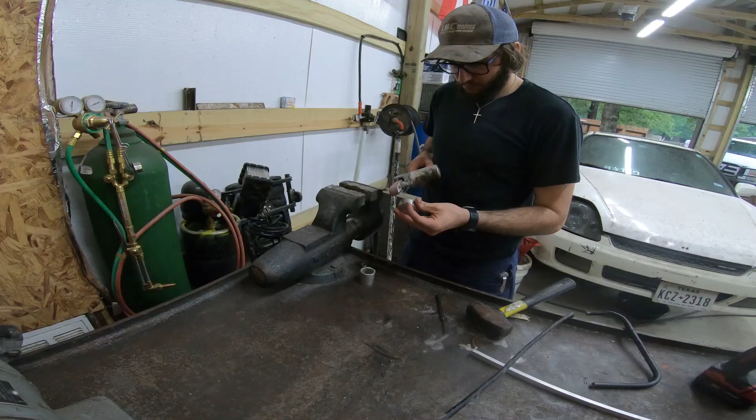Alright, so here's the plan. Cut this piece out of some scrap bar stock I had. I'm going to drill - well, there's two options, I hadn't quite decided yet. I'm either going to drill 4 holes in this and screw it, or maybe 2, and screw it into the mast with some countersunk screws. Then I'm going to drill a hole in the side and put a set screw in, so that when I put this anemometer assembly in, I can run a set screw in and just jam it in place.

I'm going to go over the mast now and see what option works better. Another alternative is to weld this to a plate and then screw the plate in, but I think the smaller this thing is, the less it'll cause issues with any rigging on the mast. And I like the fact that this is round, so if a halyard does get stuck on it, it's not going to cut into the halyard. It's smooth all the way around. With this Dynafile, I'll smooth out all the edges. But anyway, I'm going to walk over there now and see what option is going to be the best.

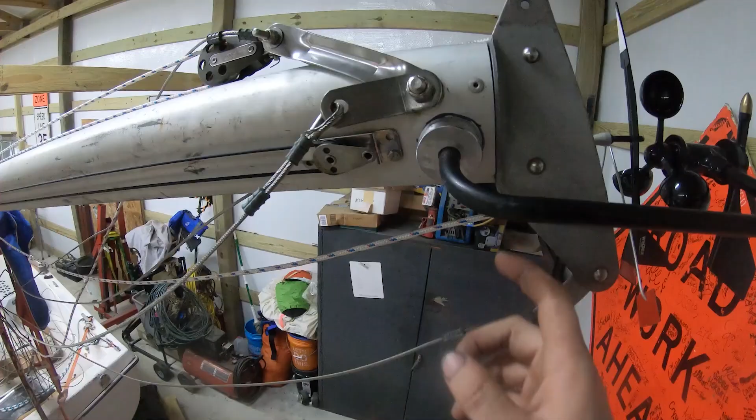Alright, so now I'm going to take this bushing off, drill my 2 holes and countersink them for the screws that'll hold it in place, and then I'll also drill my hole probably on the bottom for the set screw that'll hold the anemometer pipe, I guess you will, in place.

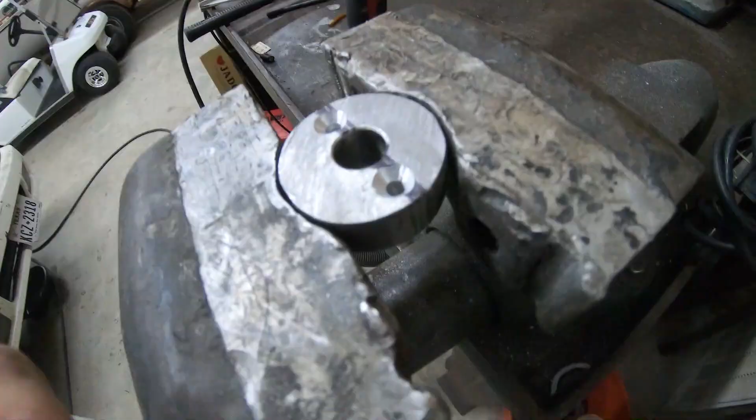Alright, so we've got this with the countersunk screw holes in it. We'll just go set this up on the mast and run a center punch through here to punch the 2 holes for our pilots, and then we'll drill them big enough where we can thread these in and they'll still grab. Alright, before we go over there and install this on the mast, I'm going to go ahead and drill for the set screw.

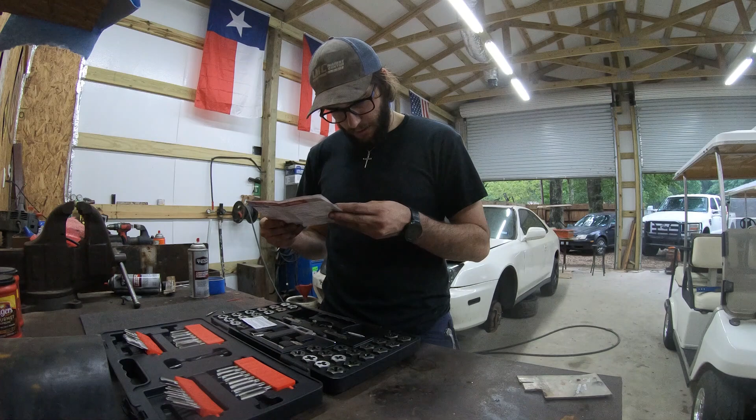And I have a stainless steel screw found in the junk drawer. 832 needs a number 29 bit. Alright, number 29.

Alright, so I actually found a little bit shorter screw, so what I've done now is just countersink the entire hole. And as you can see, the screw tip barely sticks out. It'll probably be fine. That gives me a little bit of flexibility because I want to have enough meat to get a good bite on the tube, but I don't want to have enough to crush it. So I think that's enough where even if I set it all the way down into its countersink here, it's not going to completely destroy the tube.

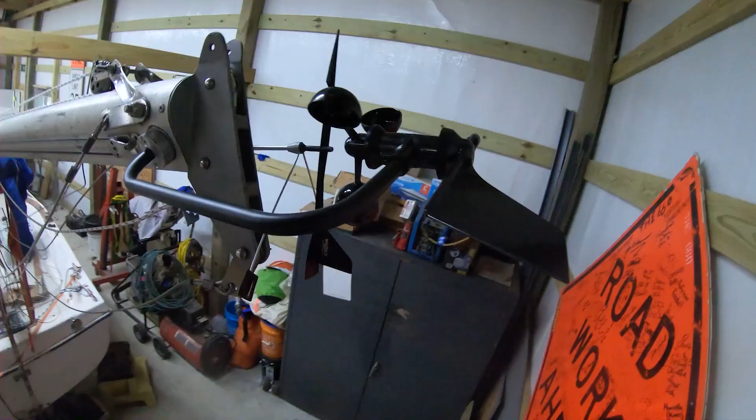Alright, so that at least temporarily wraps this up. We got our set screw here, the 2 screws holding this bushing to the mast, and I put this on the bottom so that it will naturally shed water. Here's the finished product.

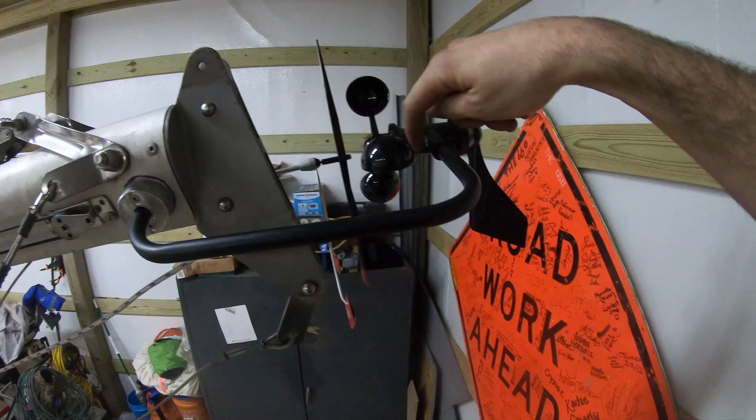You see this is pretty much parallel with the mast. I can rotate this piece. There's a set screw right here, so I can actually rotate the anemometer head itself. But if I spin both pieces, you can see that nothing contacts, so it tells me I'm good.

I'm kind of curious to see how this will react, like if the wind speed portion of the anemometer actually creates some sort of turbulence in the air. But honestly, this is going to be just a backup because I'm going to be relying on the app I have written to display my wind direction. So this is again just a backup and a quick visual reference if for some reason the tablet is dead or whatever. But I don't want to get rid of it, it's important to have.

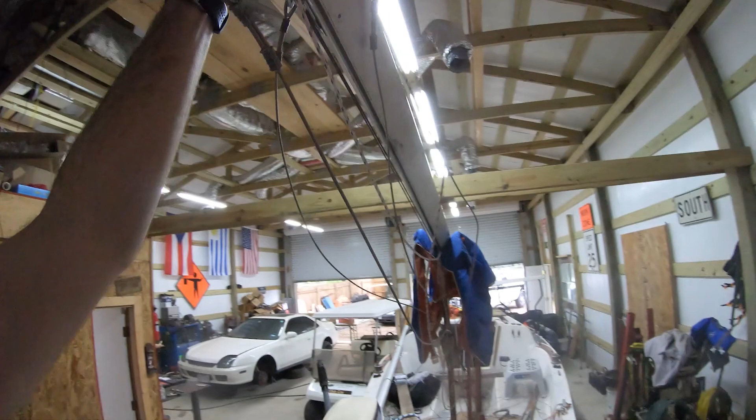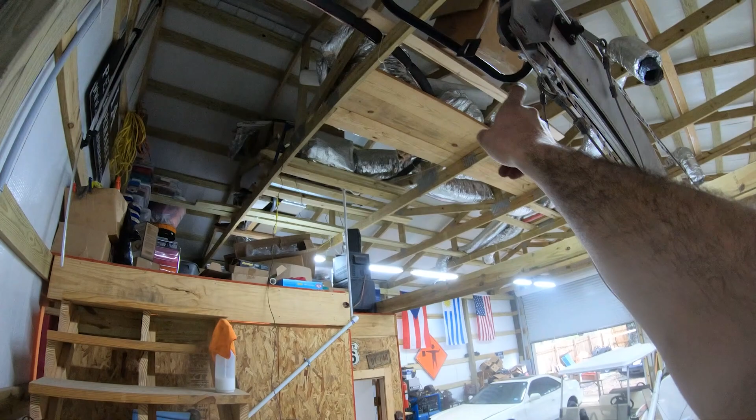So anyway, something else I've done is I lowered this wind vane, the Windex, by about 2.5 inches, just in order to get clearance so I could use the factory tube. Obviously that was bent, as you guys saw earlier. Anyway, that wraps up this portion.

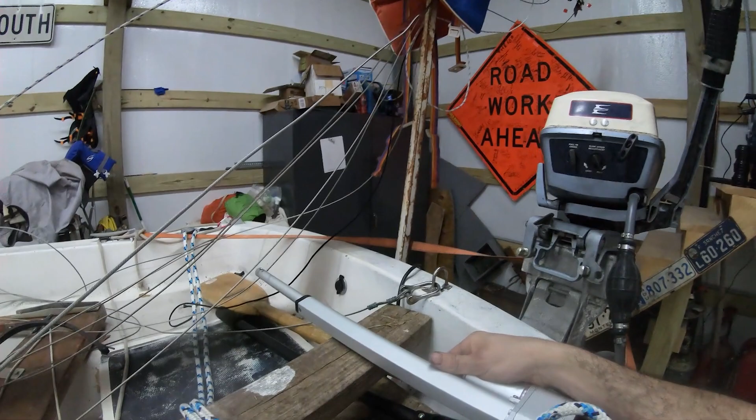So next up we will be tinkering with the cylinder. The boat's kind of a mess right now, but I have the actuator measured up. This is exactly halfway out, which is going to be our home position.

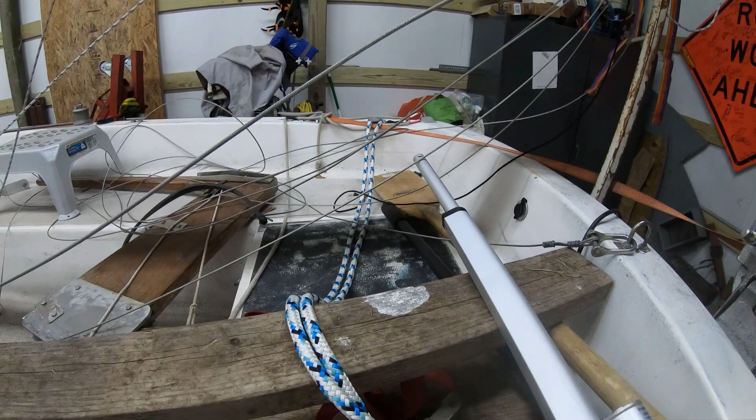I'm not sure how far back I want to mount it. That's the other reason I got a 150-pound force, because it may only be 20 pounds or so of force at the end of the tiller, but I'm going to be mounting this pretty far down on the tiller assembly itself. So having that additional force at the base, since it doesn't have as much leverage to help it, is going to be beneficial.

So I'm going to figure up a mounting solution for this. I think I want to mount it below the tiller, so I'll have a stud sticking out of the tiller that this will come up on, and like a cotter pin or a nut or something will attach it. I do want to be able to quickly remove it, but I need to figure out how I want to do that.

I may actually just do a 3D printed setup, have a bolt coming in with a nut holding a little 3D printed flange that I can pull out of the way and slide this up and down. And then absolute worst case, if something happens and I can't get to it in time, I can just smack this pretty hard and break that 3D printed piece. So the preliminary idea will probably just be a nut or a wing nut very lightly fastened.

And then on this end, I want to have some sort of bracket that I can install and remove the entire cylinder easily, because eventually somewhere on the transom here I'll have a plug for it, some sort of weatherproof plug, so I can remove it and get the cylinder completely out of here so it's not in the elements.

This obviously isn't going to be the long-term solution for a cylinder, because it's supposedly weather resistant, but it's not. It's just got these little cork gaskets, and it's poorly sealed. So I may make a fiberglass case for it or something, but more than likely I'll just find a good rugged cylinder with similar dimensions that I can modify to fit my existing system.

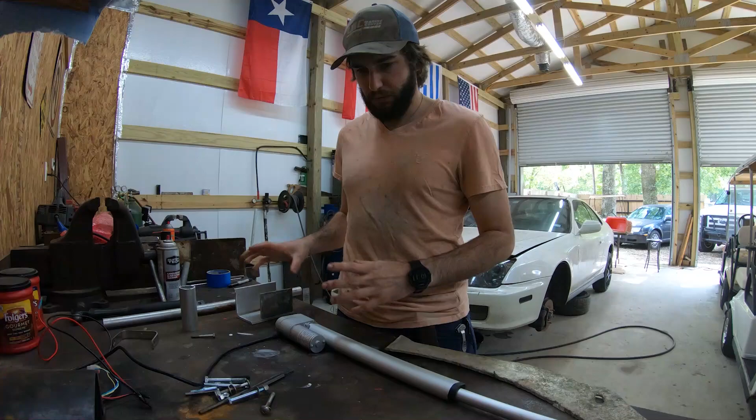But for the time being, this will work fine. The boat isn't going to sit outside all the time, it's going to be inside unless I'm using it. I could wrap it in a trash bag or put some sealant on the outside just to help it last, but I don't expect it to be a long-term solution for an actuator. So what I've decided is I was going to try to fabricate some sort of swivel assembly, but I don't think it's necessary.

So what I'm going to do is build a bracket, and I'll show you kind of what I've drawn up on the whiteboard now. I'll build a bracket where this actuator will sit on a bolt, which will give me the up and down motion I need to insert and remove it from the bottom of the tiller where my stud is going to be for it to interface, and will also allow me to pivot it and stow it away, still on deck. Then when I want to remove it, I can just pull the bolt out.

I'll probably end up using either a bolt, or I'll just get a piece of bar stock and drill a hole for a cotter pin on the bottom, or some sort of simple retainment, maybe a wing nut. I'm not sure yet, but anyway, I just need up and down, and then rotational motion, because as the actuator extends, it's actually going to need some rotation since the angle will change.

So that's kind of what I've got. I've got it drawn up on the whiteboard, and I'm actually going to draft it up in Inventor and then print it out 1-to-1 scale on a sheet of 8.5 by 11, so I can trace it out and then cut it from my aluminum sheets.

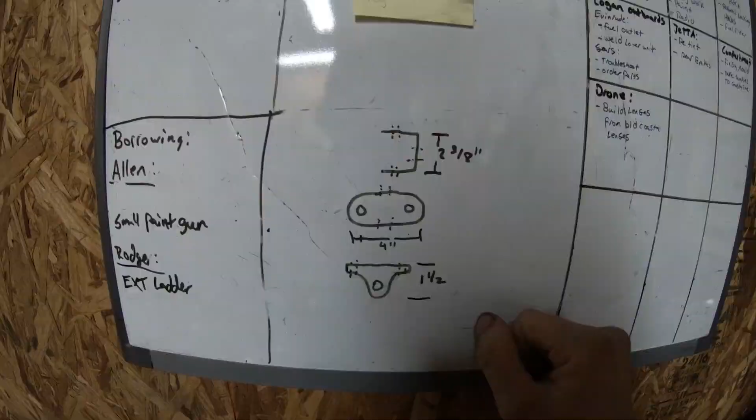All right, so here's the side view, the front view, and the top view, and what I'm wanting to do. So I'll have 2 bolt holes that bolt it into the gunnels on the inside of the boat, and then this is where that bolt/pin will go that the actual actuator will rotate on, and then these 2 holes here. So anyway, this is kind of the shape I'm looking for.

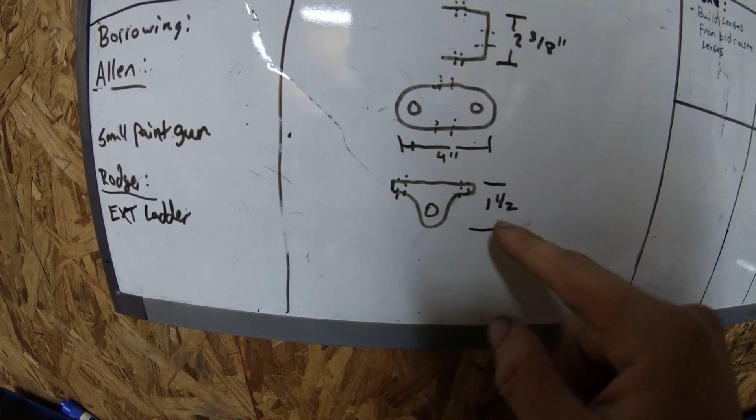I'm going to get on Inventor and throw something together. The other thing, I was going to use that piece of angle I had sitting on the bench, but the gunnels are actually slightly tapered, so I'm actually going to have to weld all of these pieces individually, because these will actually be at a slight angle.

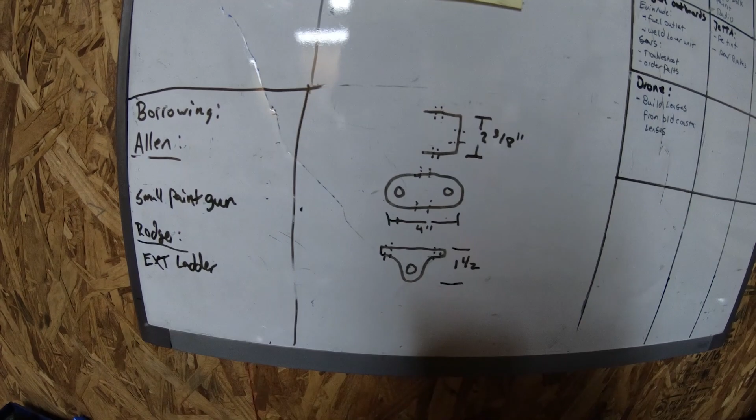It'll look something more like this. So there will be a slight angle here.

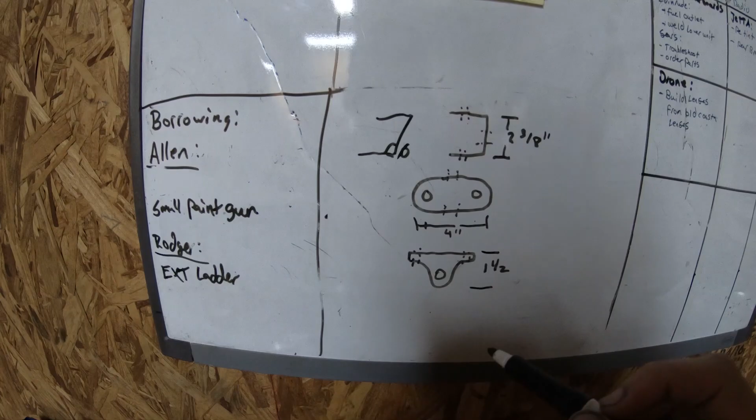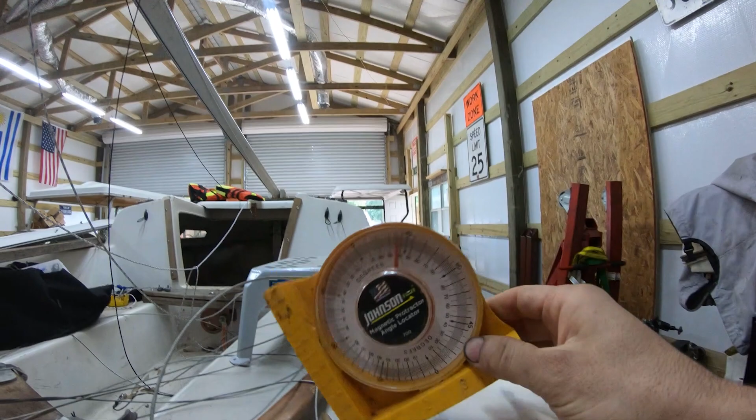All right, just so y'all can see what I'm talking about here. The boat is pretty much level on its trailer here in the shop. And then if I put this on the gunnel, you can see this is about 10 degrees off the vertical. So we do need to account for that.

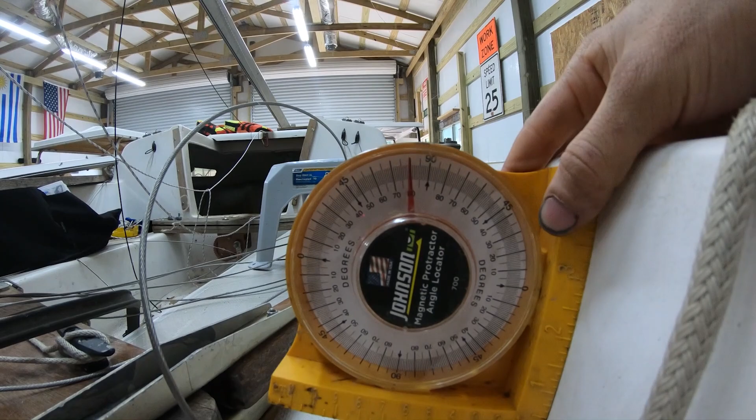I'm just going to make 3 individual pieces and then weld them up 10 degrees off the vertical on the tab. So all right, I've got my drawing printed out and cut these out, and then I'm going to use them to trace onto a sheet of aluminum, and then I'll cut the aluminum out and start fabricating this.

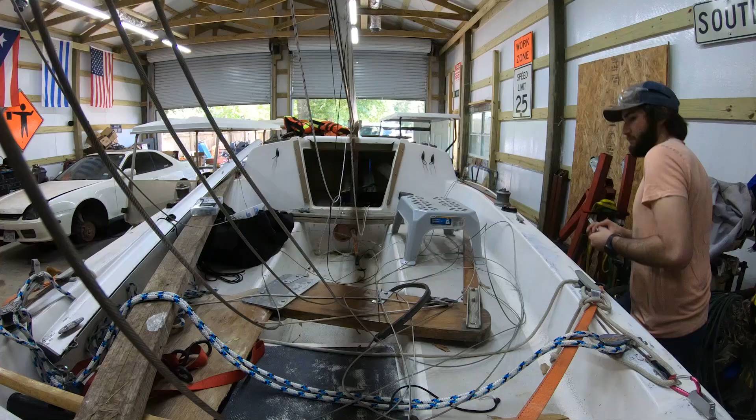Alright, so I got my pieces cut out. Turned out alright, it's just hand cutting the plasma on aluminum, so it only gets so good. But anyway, got them all buffed up, cleaned up, pretty close to being weld ready. All I need to do now is wipe them all with acetone before I actually weld.

But I wanted to just set it up here and see kind of what this is going to look like. So I do realize now that I've made a slight mistake in that both of these are the same length. One of them really needs to be shorter than the other because of the angle. So what I'll probably end up doing is welding one on top and one on bottom, and that'll get us quite a bit closer, and then I can just grind them back to the same dimension.

So by that I mean one of them will be welded here on the edge, and then one of them will be welded on the actual top of the plate. So something like this, if I can see that.

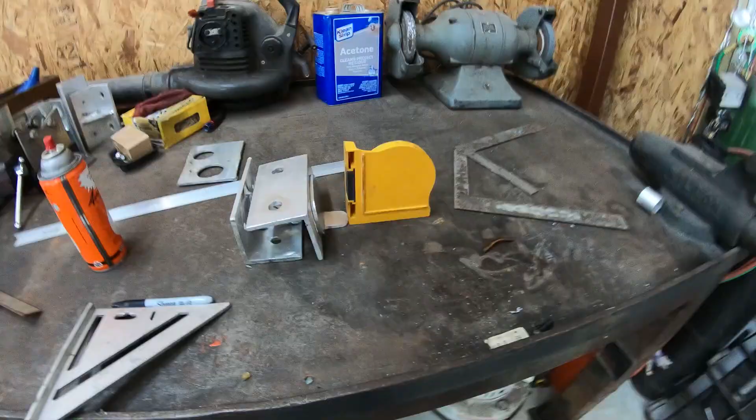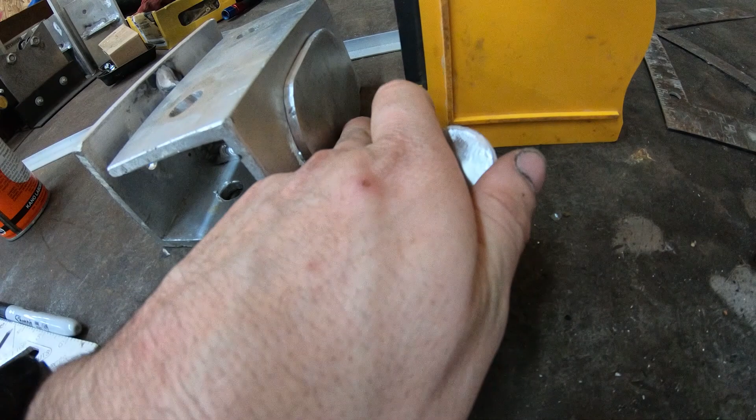Alright, so I have my plate here set up at 10 degrees. So I've set my flange there. And then I've set this piece below and flush up against this back plate. We're about 1/8 of an inch of difference between the two, which I'm tempted to say is acceptable, but I may go ahead and cut another one a little bit longer just to cover our bases here.

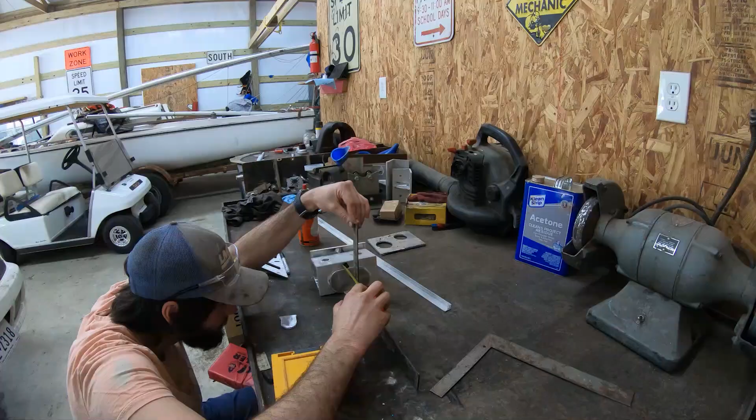Alright, so the new one's going to be 2 inches long, and this is 1 3/4, so we got to add a 1/4 inch to this length here. Alright, so I got my other one cut, it's a little longer. As you can see, about a 1/4 inch. So now we'll see what this looks like.

That's just about perfect. So I guess this one's a little better. Yeah, so that one's just a hair better.

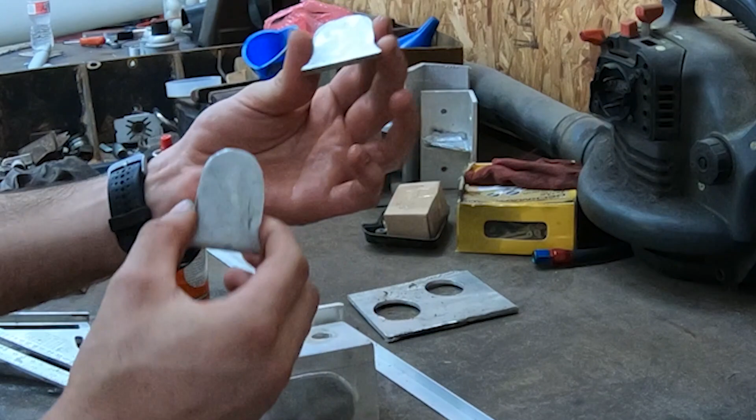So what we'll do now is come in here and shape these to where they're the same. As you can see, the back one is just a little bit more blunt, so I come around and shape it. Then I'll drill both of them together so the hole is in the same position relative to the tip, which at that point the tip should be the same distance from the plate, and then we'll go ahead and weld it in.

Alright, so what I've done here is just clamped the two together. Now I'll use the smaller one as a guide, it'll be just fine. I'll come in here and shape all these together so they're uniform, so the tips are even. I just got to knock off these little corners, and I'll come back to knock off these little radiuses on the ends. But anyway, we'll go over to the Dynafile and get these straightened up.

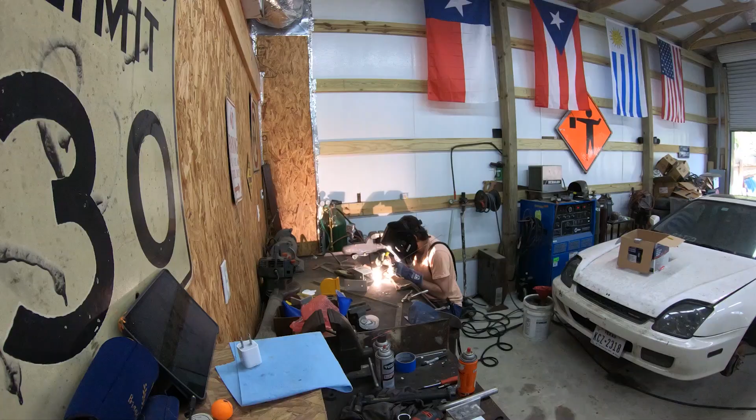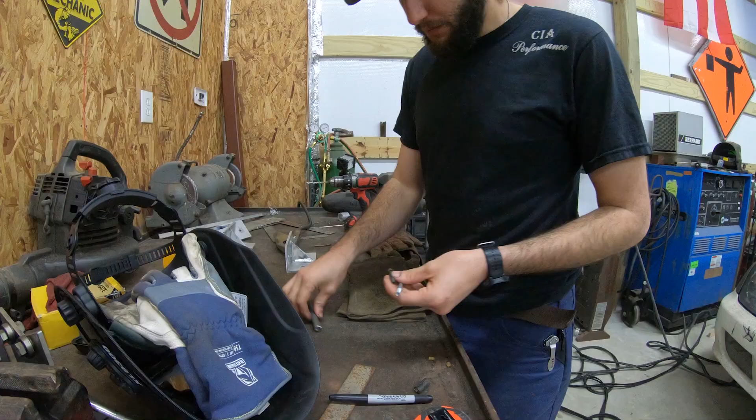Alright, so I've got my two bolts here, this one to go through the tiller, and then this one to go through the actuator arm. So I'm just going to centralize them as best I can and weld them onto the stud, and then we'll go see how it fits.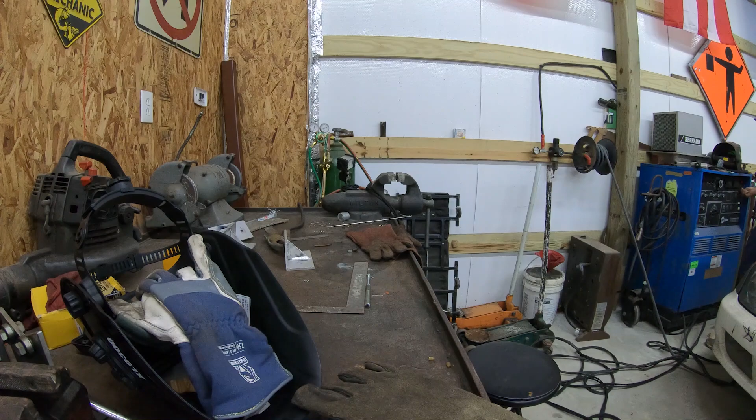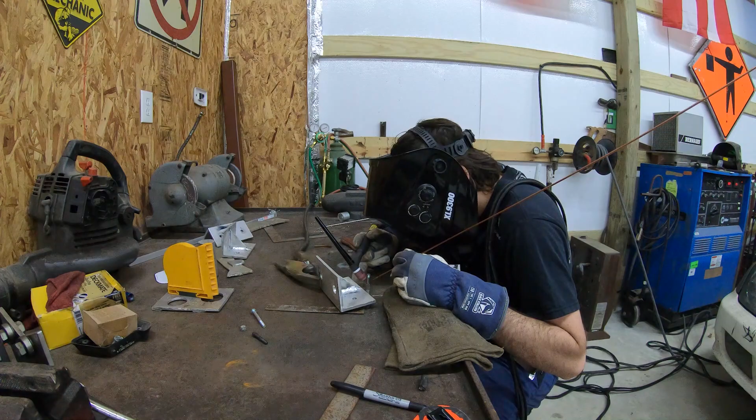Alright, so I just have a 12-volt power converter, 120 volt to 12 volt, and I'm going to send power to this just manually and see what it does.

Alright, so that's max to port. That's boat to port, tiller to starboard, and then this is max boat to starboard, tiller to port.

Alright, so that actually gives us a fair amount of angle for the autopilot itself, and we're not expecting huge corrections necessary. But that's really like when we're sailing. I'll look back at some videos, but I don't see me moving it any further than that, except for when we're tacking.

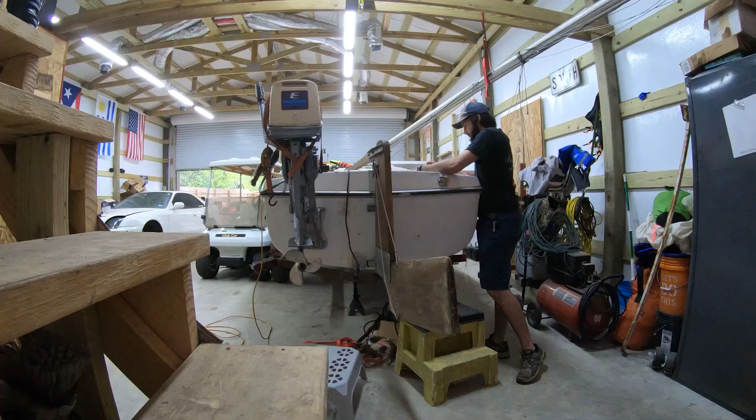That's enough to deflect this pretty hard, and it's pulling with no problem, and my rod is staying relatively straight. There's a little bit of deflection, but not much. So I think that spacer rod will work.

Like I said, I need some sort of quick connect idea, but I'll just brainstorm that for a little while and see what I come up with.

Well, that about wraps up these two items, the anemometer and the actuator itself. So I'll finish getting the actuator spacer stud welded, and then I'll bolt the aluminum bracket to the gunnel.

Hopefully next time I see you guys, I'll have the mast stepped up in the yard and have the autopilot actually working, so I can move the boat on the trailer, or move the trailer heading to the wind, and we can see the tiller actually correct. Then I'll move the boat back to kind of simulate the boat making that heading change and seeing if the actuator stops. So anyway, we'll see how that goes, but hopefully that'll be here within the next couple days.